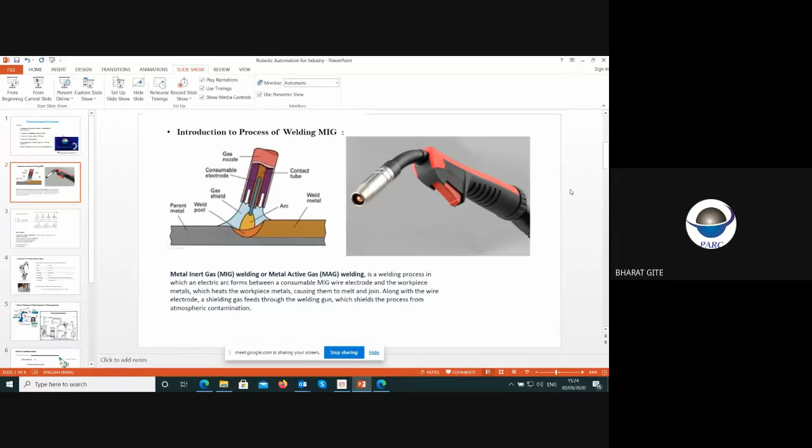If you check the next slide, it shows which welding shielding gases are used for welding applications. It's CO2, argon plus oxygen, or argon plus CO2, depending on the percentage.

If you see the chart, in detail, if I use only argon, the penetration is maximum and the bead size is low, and the spot you see there is a spark, that spatter you can say.

While welding any material, sparks are generated, sparkler-type sparks, which are unnecessary but generated in the process. To minimize that spark, we can use different types of gases. If I use argon gas, there is less spark and high penetration. If I use 100% CO2, it gives less penetration, a bigger bead, but more spatter.

This is a very important factor in welding applications - what gases we use and how we can achieve better penetration with less spatter. It depends on the combination of argon gas with oxygen gas, or argon gas with CO2 gas. This is some idea I wanted to give about welding applications.

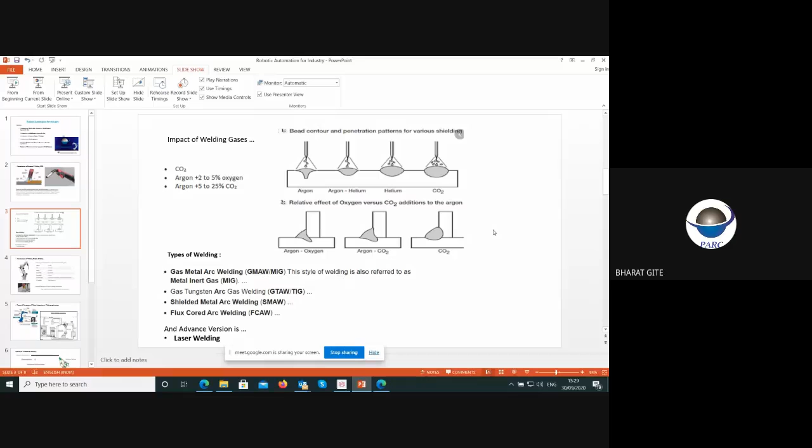Okay, so this is about welding. The next topic we are going to cover is the introduction to robots.

If you check robots, in front of you there are multiple types of robots - human robots, handling robots, vehicle robots, all types of robots are available. But this is a special type of robot used for welding applications, which I am showing.

It's a welding robot with 6 axes of movement. It has 6 axes of movement, where I can cover any profile - straight welding, round welding, curve welding, any type of welding - I cover with these 6 axes of movement.

It has payload capacity from 2 kg to 30 kg, depending upon your application, whether a small gun or a high welding torch. It has different types of welding speed, different acceleration, and repeatability less than 50 micron. That is a very good accuracy level for these robots, giving precise welding form or precise application. We can use a robot for welding.

If you check robot makes in the world, there are a number of them. In India now, Tata Motors has entered robot making. From Japan, you can see Fanuc and Motoman as robot makers. From Germany, Kuka and ABB are robot manufacturers for typical applications. So this is the main important application of the robot in welding.

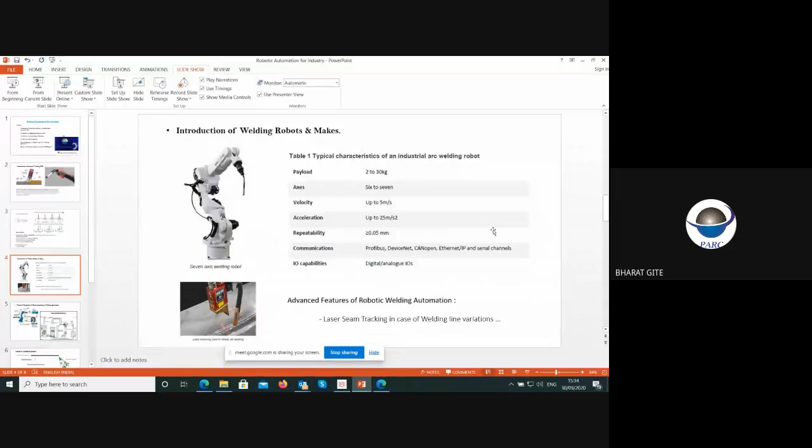Now we'll move towards the equipment used for robot integration. The basic robot comes with a main manipulator with 6 axes. It has 6 motors, servo motors, to rotate individual axes in individual positions. So this is the one manipulator with 6 axes of movement.

One is the robot controller, a control unit which is programmable, where I can program all the axes in individual directions. That's the one controller that comes with the robot. And one is the programming pendant, which helps us give inputs or make the program for the robot. These are standard units that come from the robot manufacturer, since we are the integrator providing the automation solution, so that standard product is available in the market.

We take these standard robots and integrate this unit in our applications, like for welding applications, for handling applications, or for some painting application. So it depends upon the application.

So if we check the robotic applications, in the robotic welding applications, the right side diagram shows all the equipment required for the welding automations. If you check, there is a robot controller, there is a Motoman controller. This is an example of, suppose, Motoman robots.

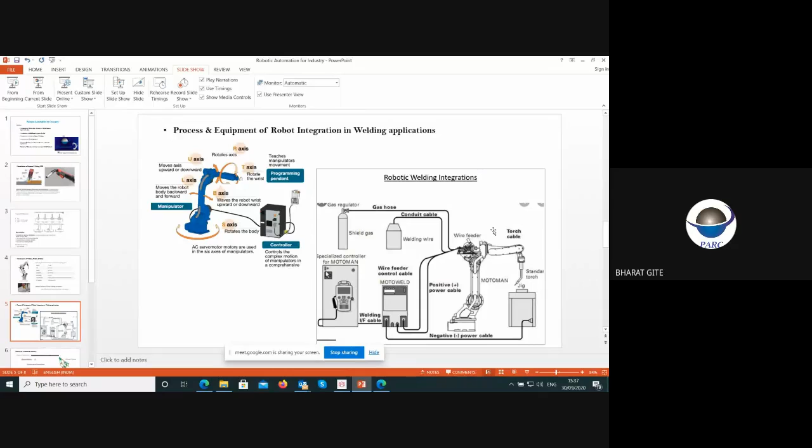So this is the process of how the robot works in the industry, how they integrate, how they connect, which are the important inputs required for the welding automations.

So next we'll go to the next process, the actual how. Now I just discussed all the equipments that are available, how the process is going on, how the automation is going on. So now I will give one small example of how PARC Robotics or any automation industry works for the industry, because it's a practical thing.

Everything is okay theoretically, on paper it is different, and the actual industry, how they work to give the actual products. So I will give one example of how the customer gives the inputs, and how in this way we work out and give the solution.

So first, as a customer requirement, is the welding automation for frame line or swing arm line. Frame line is, if you see on the right side, there is a 3D model of a frame. That is the frame of a Mahindra two-wheeler. If you check on the road, now Mahindra launched a new vehicle, the Mahindra Jawa.

That vehicle has one chassis. Inside the chassis, that means the tubular structure where all the parts are mounted: front wheel, rear wheel, fuel tank, seat, everything is mounted on this frame. So we have to give the solution for this frame formation.

So now the customer doesn't have any inputs, they only have the 3D model. We have to give the solution for how to form this model or how to productionize this frame. Now, suppose they have the requirement of 60 seconds per frame, meaning in 1 minute they have to manufacture one frame. For that application I have to design one line, I have to give the solution for the manufacturing of this frame in one minute.

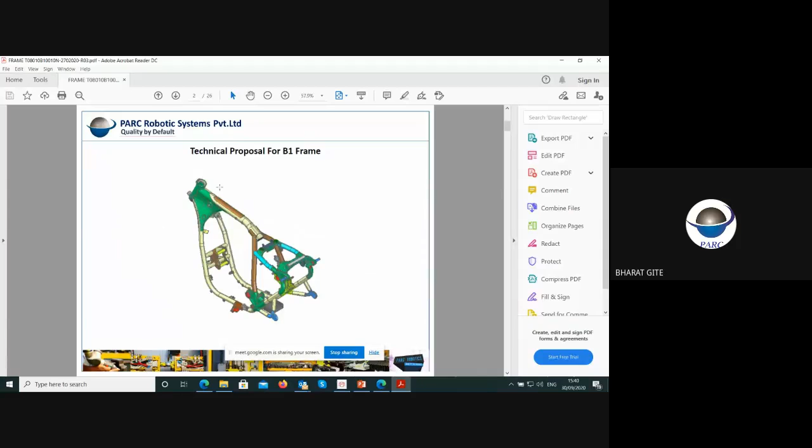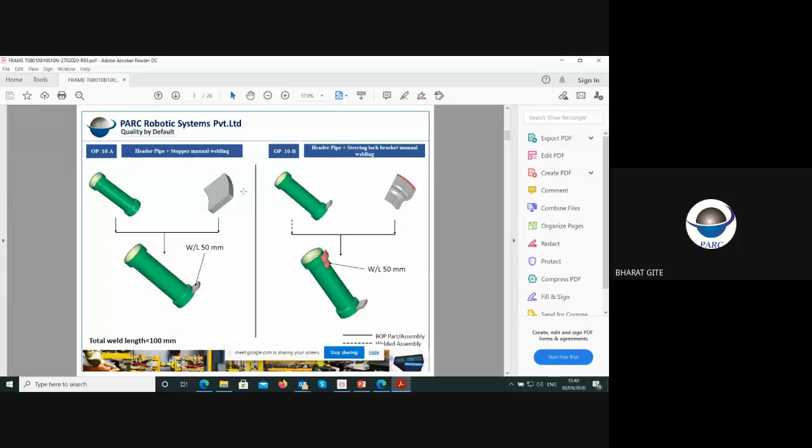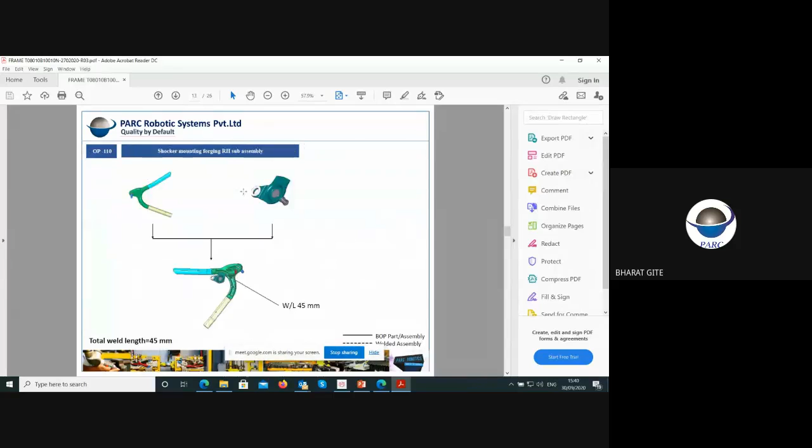If you check operation 1, I take one tube, suppose the front side. Front side is a header pipe tube, and we weld that header pipe tube with a small part, about 50 mm of welding. Second process, there's another patch to weld with the first, forming another subassembly. Third process, another subassembly. In this way we keep building and developing one complete subassembly after another.

Now we come to the skeleton formation. Subassemblies or child parts are manufactured earlier, and now we bring them into one common assembly fixture that gets connected. Another child part is welded in the next stage, and the remaining parts are welded in subsequent stages. Finally, the frame is formed as per OP 200.

I started from OP 10 up to OP 200, in a line of 20 stations required to form this frame in complete automation. Each station has a cycle time of 1 minute, so I have to design the line accordingly. Each station should complete its activity in 1 minute so that I can get output of one frame every 60 seconds.

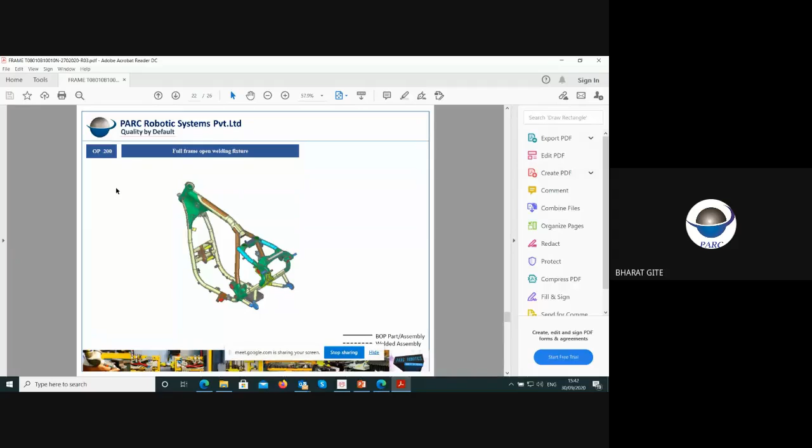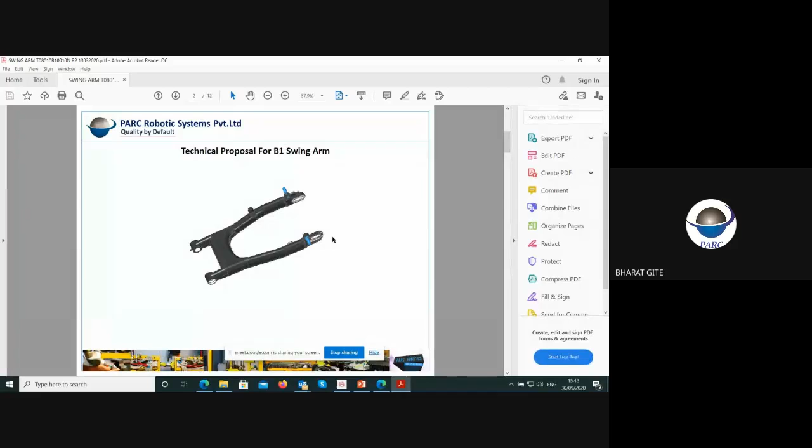This is one example, and now the process is finalized. I have another process for the swing arm. The swing arm is for the rear wheel - the rear wheel is mounted in the swing arm along with the chain sprocket and everything. It has a shock absorber and moves up and down on the road.

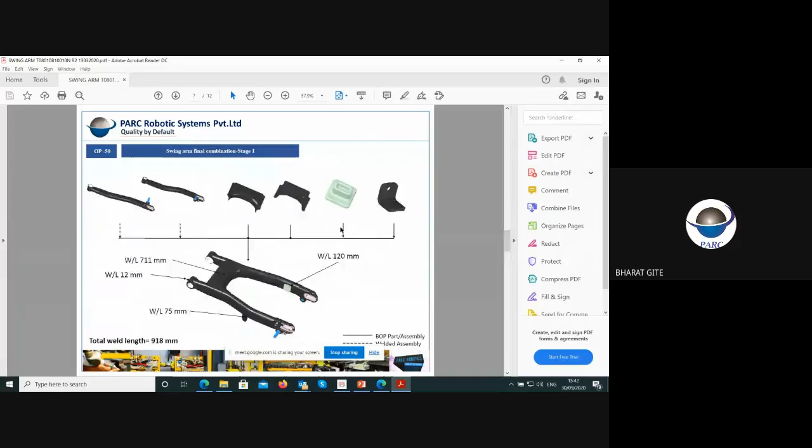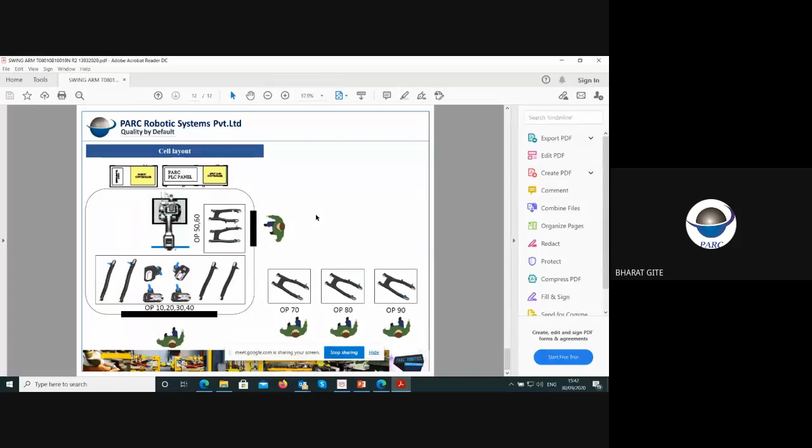This is also one process of the swing arm. We define the layout also - where the robot is, how the robot moves to weld at different stations, how operators are positioned, and how many operators are required for the line. All these basic processes and layouts are defined in the organization before starting the design activity.

Now, after completion of the process, we go for the final design. I will show one example of the final design also - the swing arm process which we defined earlier. This is the process of design.

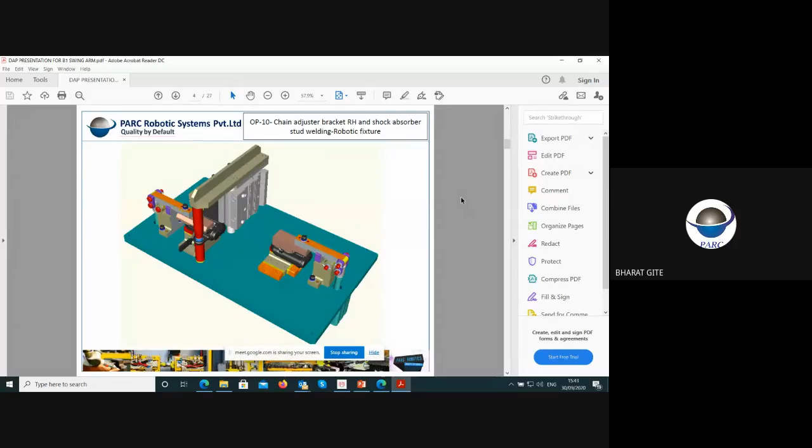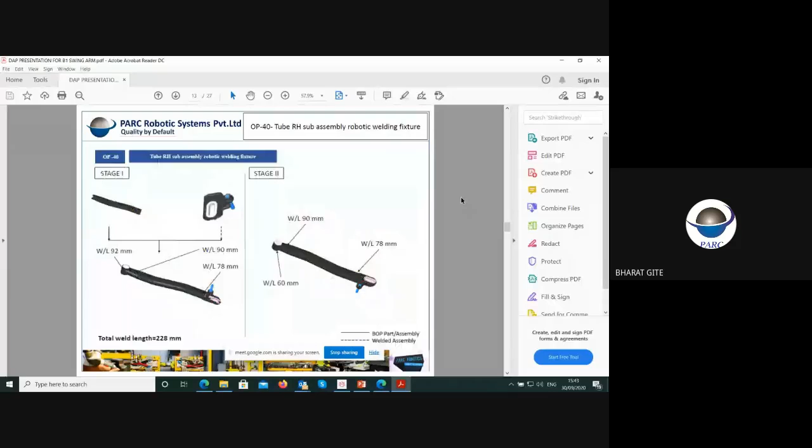As per the requirement of input parts, we design fixtures for each stage and next process, to hold the individual components, because the inputs are loose components. I have to hold them in a vehicle mounting condition and weld it. So it's a complete design activity - 3D modeling as per vehicle requirements and complete assembly drawings - and we get approval from the customer.

So this will be our design activity, and the fixtures line will be like this. Now this activity is completed. After completion of design, we start manufacturing. Most people are aware that once the 3D model is completed, we convert it into 2D manufacturing drawings. Individual parts get manufactured, then get assembled in the fixture, and fixtures are ready with inspection for part loading. In between, the manufacturing BOP process is a parallel activity after design manufacturing.

Now I will show the assembly integration, how the assembly is going on. We have some photos of the existing setup showing where the assembly is happening - the robotics cells, first cell, second cell, third, whatever the 20 stations we discussed in the last PPT. There are 20 stations for completing one complete frame - OP1, OP2, operation 10, 20, 30. In this way, all 20 stations are manufactured and assembled, ready for weld.

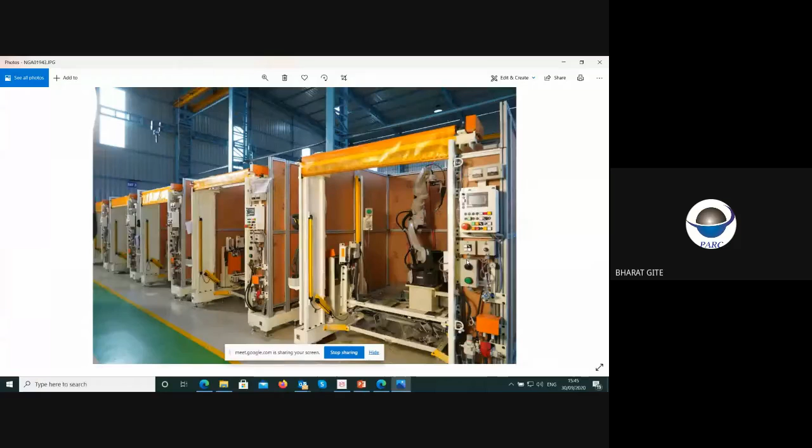Now you can see the robot also, and there is a welding torch also. All the equipment is assembled at the back side - welding power source, gas hose, wire spools. In this way, the line is ready for the trials. This is the process.

I have another example of the robotic cell integration - how the control panels, authorization box, cycles and control elements are set up. It's not mechanical, it's control related - cycle authorization, robot start button, clamp, declamp. Everything has to be prepared and mounted on the robots for the integration and to give the cycle start to the robot.

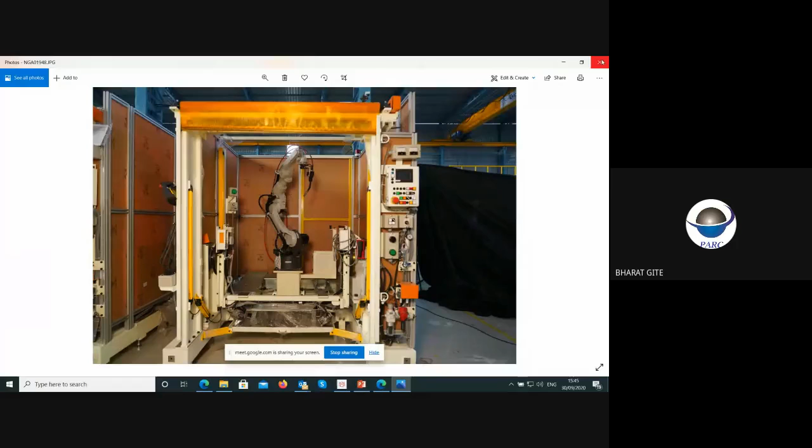Once I complete the assembly, all the line is completed. Now we are going to conduct trials on the input parts, because input parts come from the tier 1 suppliers. We have to assemble here, weld here, and complete the final inspection. So again, I have a small video on how the process is going on after manufacturing, so I will show that video so you get a better idea.

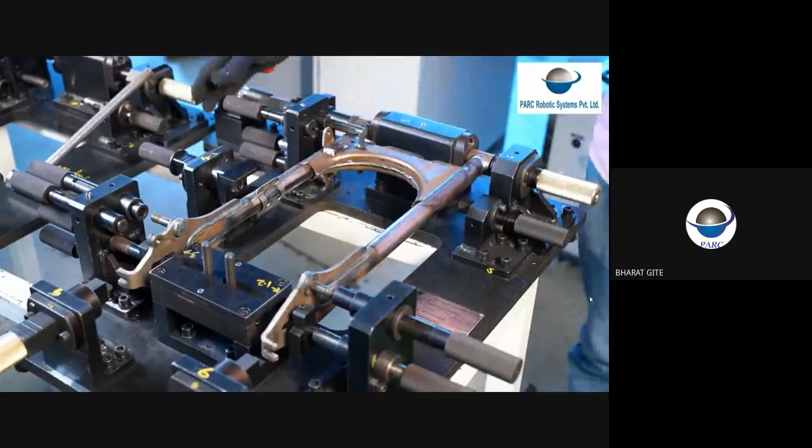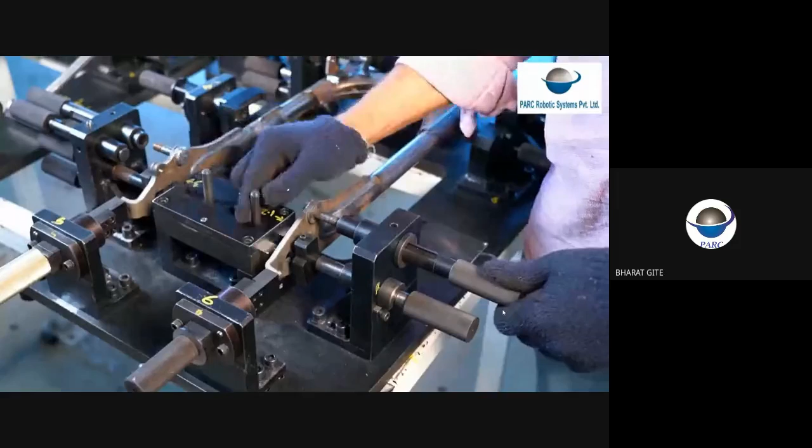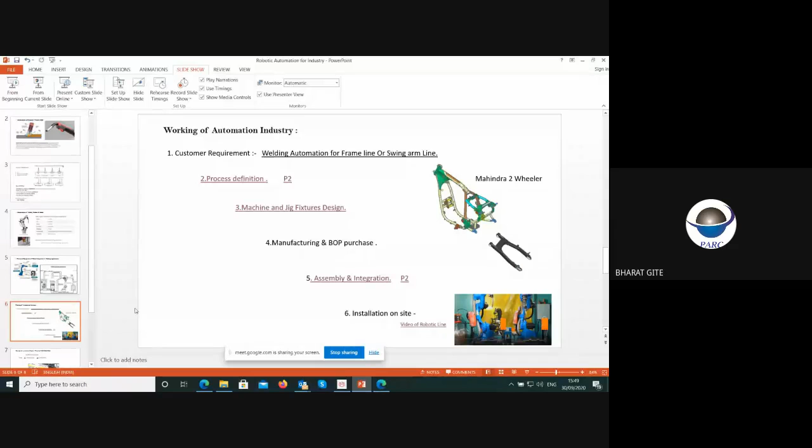So you see the complete line, how all the stations are working for the optimized time and how the part is formed from start to end. Now if you check at the end, we form one swing arm with complete inspections and the correction station also. So this is the basic process, from design, manufacturing, assembly and execution on the operator's customer side. This is the process I wanted to show, so you get a better idea.

Now after welding automations, I have one solution or topic on the actual riveting automation, because as I told, 90% of the work of welding automation is going on in PARC Robotics, but some 10% or 15% we are working for other special purpose machines or other automation solutions also.

So I want to show one automation solution of riveting. We have a complete live video for the riveting machine operations. You can see how it's working, what operation is going on. I prepared that video for training purposes, but you will get a better idea of the automation elements and products we use for the applications and how they work. So it's better you go through this video and check.

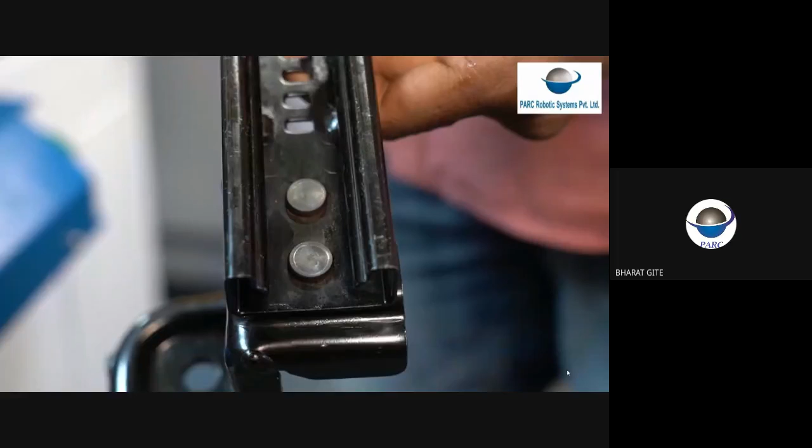So now that's all about the riveting automation, which is non-welding automation, and it shows the required components used for the automation, how the PLC controller is working for selection of the different components, and how the process is going on for multiple variants. So this is again one example of automation.

So I think we covered all the required topics today, and that is the things we are going to present as per the requirement. So that's all for today. Thank you very much for the session.